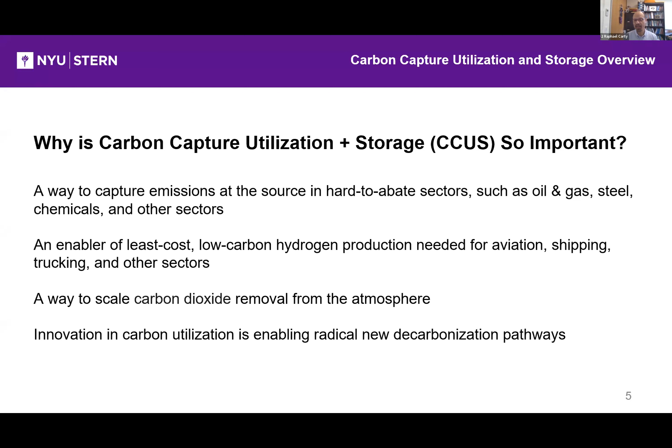This sector also provides a way to scale carbon removal from the atmosphere. As the window is closing to avoid the most onerous scenarios, we have opportunities with the technologies in this space as we cost reduce and get to scale on things like direct air capture to put carbon removal right alongside emissions reduction. And last, this opportunity to utilize carbon as a feedstock in all the different types of innovation and utilization is really unlocking radical new decarbonization pathways in a multitude of different industries.

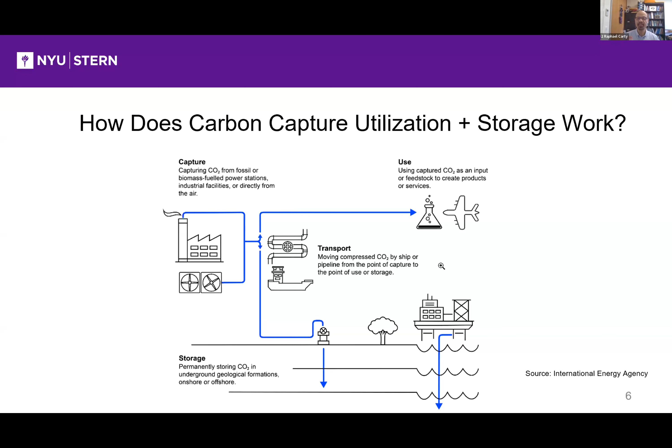Let's just talk for a minute about how carbon capture, utilization, and storage works. Up to the left, you can see that we're capturing carbon dioxide, whether it's from fossil or biomass-fueled power plants, industrial facilities, as I referenced a few moments ago, or directly from the air. Depending on the siting, that captured CO2 may be permanently sequestered right there in an underground area. But most often, the carbon dioxide is compressed into a liquid, transported, and then used elsewhere. And we'll get to the utilization in more detail in just a minute.

Let me just do a quick definition of terms. Carbon capture and storage was the original umbrella term for this space. Today, it's often used mostly for point source capture and storage, not so much from the atmosphere. Carbon capture, utilization, and storage is the new umbrella term, which reflects the increasing role of carbon utilization. It should encompass all tech in the space, but some people may still use it to refer more to point source capture versus direct air capture. Direct air capture is a much newer innovation, just about 24 years ago, capturing diffuse carbon dioxide from the air. It's an emerging technology that's critical for carbon removal.

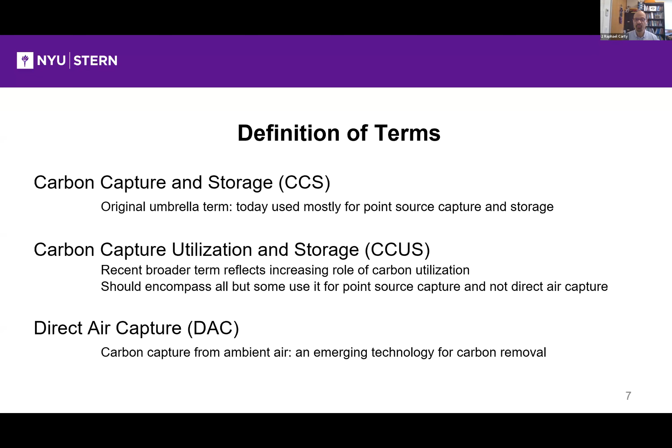Let's talk about innovation in the space. It might surprise you, but 90 years ago, the precursor to carbon capture and storage started when natural gas producers started to separate carbon dioxide from methane. Carbon dioxide in a solid form as dry ice has been used as a refrigerant for 90 years. It still is today. That's perhaps the first commercial carbon utilization market in America. As we fast forward to the 1960s, a new use emerged.

The first pilot plant for enhanced oil recovery came from injecting carbon dioxide into oil wells to increase extraction. By the 1970s, that reached commercial scale. By the 1990s, carbon capture and storage moved from just extracting more fossil fuels to being seen as a way to really help with emissions reduction.

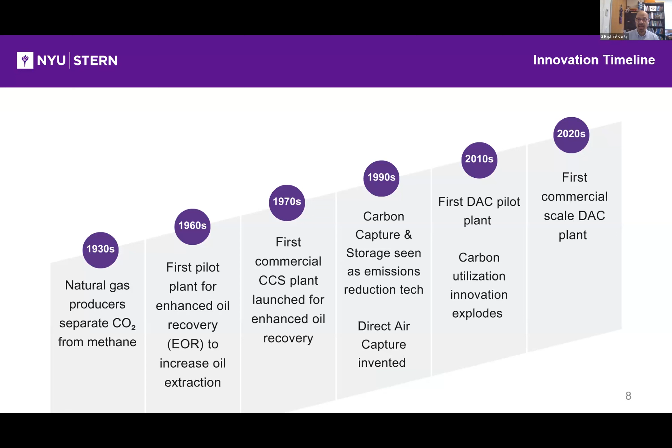And at the very end of that decade, in 1999, direct air capture was invented. Moving forward to the 2010s, we had our first DAC pilot plant, and this is when carbon utilization innovation explodes, as we'll come to in a second. And in the last year, we've now achieved our first commercial scale DAC plant.

Let's talk about point source to introduce Brian's talk. Original focus was on oil and gas fields. Today, it's a critical strategy and the DOE policy for reducing emissions in those hard to abate industries that I mentioned. But it's also being applied in non-traditional domains. And I think it's very interesting what CarbonQuest is doing in applying this to the built environment.

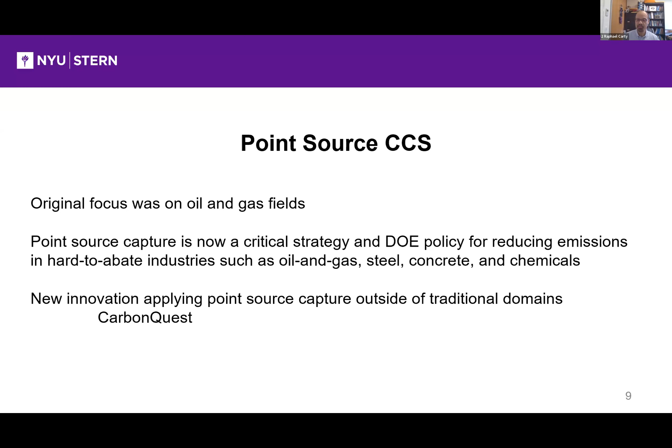Moving to carbon utilization, no matter where the source is from the center, on the right, we have the original utilization uses, starting with dry ice, then fertilizer, then additives to foods and beverages, or injecting it into oil wells. And in all of these uses on the right, carbon dioxide is not converted. It's just taken either in a solid form as dry ice or a liquid and as an additive.

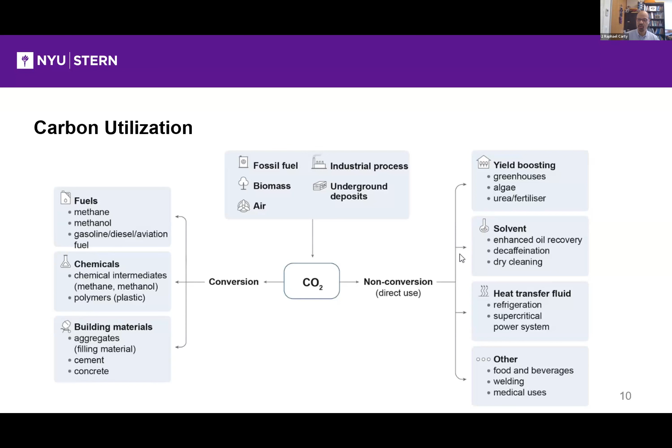As we move to the left, we get to some of the very exciting developments in the last 10 to 15 years. The conversion of carbon dioxide into fuels and chemicals, David will talk about that in a minute, or into building materials. It can be sequestered permanently by making it a component of cement and concrete. So carbon utilization today has gone far beyond fertilizers and putting the fizz in soda pop and enhanced oil recovery. Innovators such as Dioxycle are pioneering radical new decarbonization pathways by replacing petroleum derivatives with carbon-free alternatives using the carbon dioxide as the feedstock.

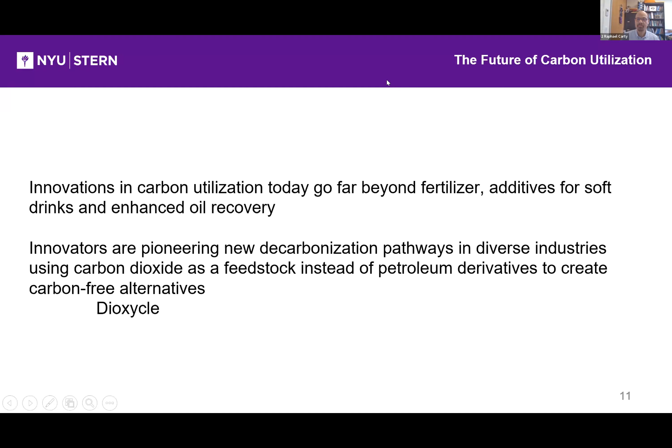So at this point, I'd like to turn the panel over to Brian, who will share his screen and talk about CarbonQuest. Thank you. Fantastic. And thanks, Professor Carty. Appreciate the invite to speak in front of you all today. Nice to meet you all.

I am Brian Asparro, the Chief Operating Officer for CarbonQuest. We're focused on reducing emissions in a large, broad built environment. The problem statement we're trying to solve here is reducing emissions in the built environment. Overall, emissions from buildings in the United States comprise about 40% of overall emissions. It's a particularly acute challenge within cities, where buildings comprise 60 to 80% of emissions. In New York City, it's 67%, with transportation and waste being the remainder of the emissions.

In particular, commercial and industrial, or C&I, buildings across the United States utilize natural gas, primarily for heating, hot water, power, steam, and that is one of the biggest challenges to reduce emissions. As a matter of fact, in New York City, the largest single category of emissions comes from natural gas to heat buildings. And it's one problem that's very challenging to decarbonize.

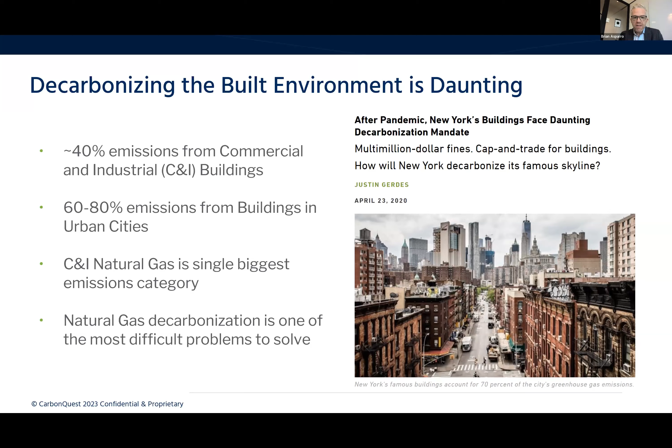So from a journey standpoint with CarbonQuest, we really see two main trends as it relates to compelling building owners to reduce emissions. One being sustainability initiatives, net zero, scope 1, 2, and 3 initiatives that have been set primarily by property owners or corporations as a competitive advantage. Second, regulatory drivers. These regulatory drivers are primarily in the form of programs associated with capping emissions for large buildings and emitters. In particular, we're seeing this becoming more acute in cities.

In the building sector, Professor Carty mentioned earlier hard to abate, traditionally being focused on large heavy industry, steel, cement. What we're seeing in terms of hard to abate is large buildings being hard to abate. What does that mean? Essentially, the cost to retrofit an existing building or property to reduce emissions is cost prohibitive. And so we should be looking at those types of industries or buildings differently.

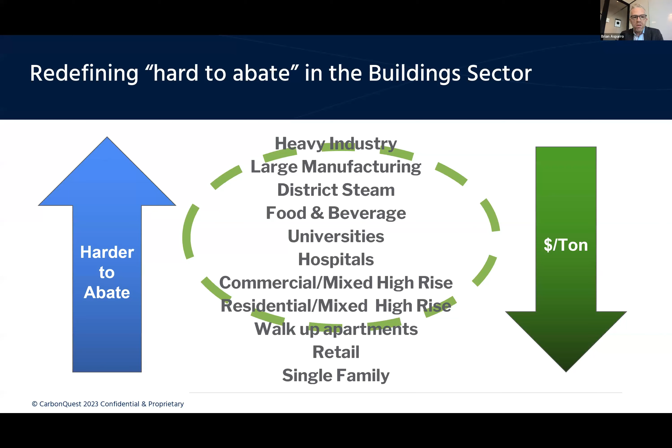What we're seeing is that it is now going from cement and steel into large manufacturing, district steam to provide heat to a university or a number of buildings, food and beverage, hospitals, commercial properties, large residential properties. And so the definition of hard to abate over time has become much more broad and challenging for large building owners to reduce emissions. At the same time, 20% of emissions in the United States comes from natural gas in large buildings. We've calculated over 700,000 large buildings that fit that hard to abate definition.

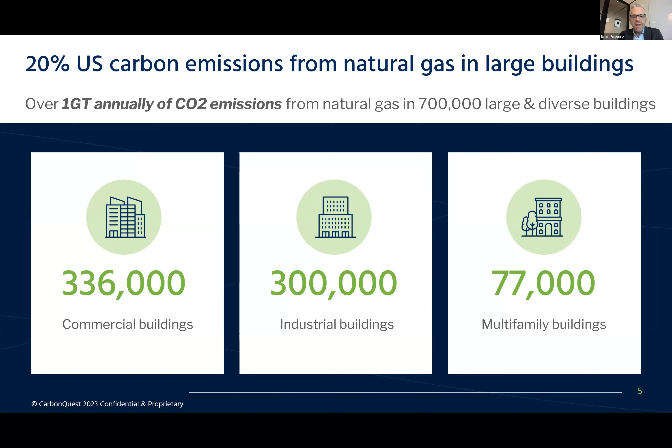New York City is one of the leaders in putting together programs to cap emissions. A program called Local Law 97 goes into effect in 2024, in a little over 2 months, where 50,000 of the largest buildings, all above 25,000 square feet, will have emissions capped and will be paying a penalty in the event that they emit above that cap.

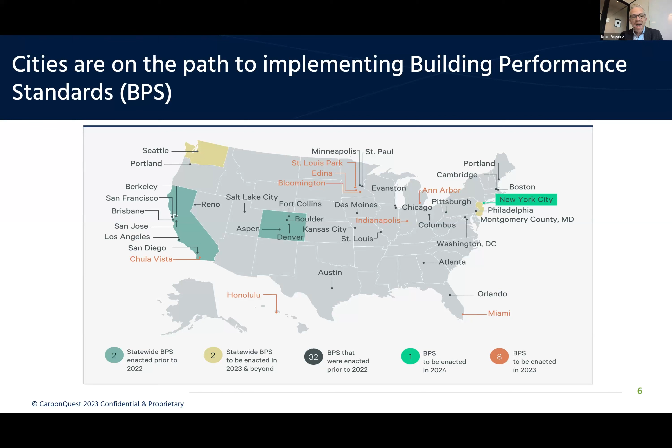Some of the pricing in the program with Local Law 97 is really the highest in the market at $268 per ton. It's estimated that by 2030, roughly 25,000 to 30,000 buildings will be subject to paying a penalty at almost an aggregate of $10 billion. And so this is becoming very meaningful for building owners to start to develop paths towards decarbonization, not just for sustainability, but also for looking at their own emissions and penalties that they may be facing.

And the challenge that building owners like NYU face with laws like this are penalties to be faced as a result of the emissions. At the time NYU installed the combined heat and power system, it was one of the lowest emission sources of power to be installed in terms of efficiency. However, over time, with a focus on reducing emissions significantly and immediately, there's a challenge associated with a significant amount of natural gas on site that will be creating emissions.

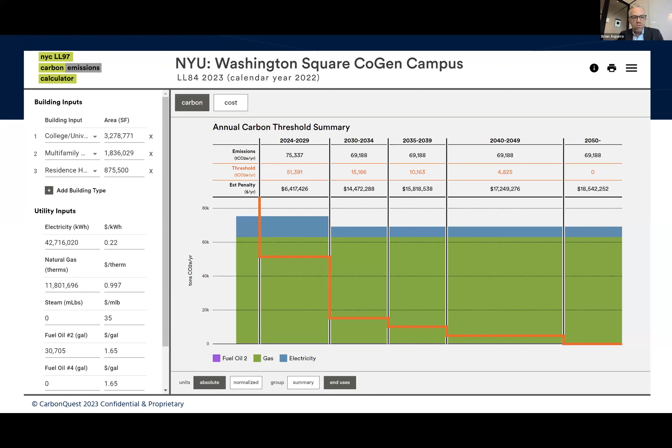And this is where we, as CarbonQuest, really saw a great opportunity. What are buildings to do in terms of options for decarbonization? There are options of buying offsets, on-site renewables like solar, energy efficiency, or fully electrifying the building or property in order to receive low carbon electricity.

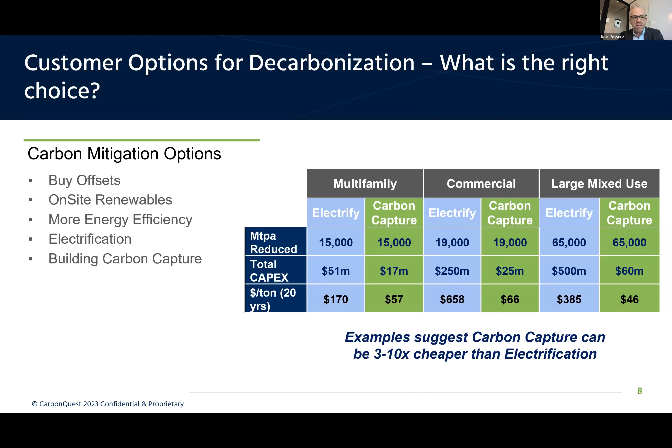What we're entering into the equation is what we're calling building carbon capture. As Professor Carty discussed before, traditionally this has been done at large industrial gas facilities and power generation, and we're taking it down to the building level. We're doing so because we're seeing that in cases where property owners are looking to electrify, carbon capture can be 3 to 10 times cheaper for the same amount of carbon reduced.

What is it? It's a technology that we've developed. It's a solution for natural gas emissions, which we call distributed carbon capture, a 4-step process where we extract flue gas, the exhaust that otherwise would have gone out the chimney, which includes carbon dioxide. We separate the carbon dioxide from the nitrogen and oxygen through a materials-based approach. We convert that carbon dioxide gas to a liquid. It's beverage grade liquid carbon dioxide, and then we utilize it in applications.

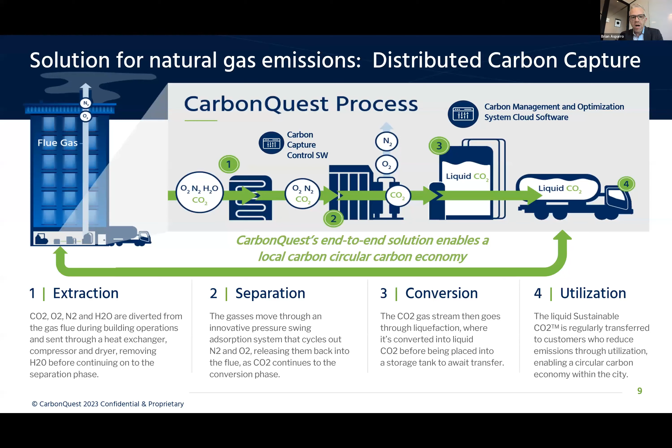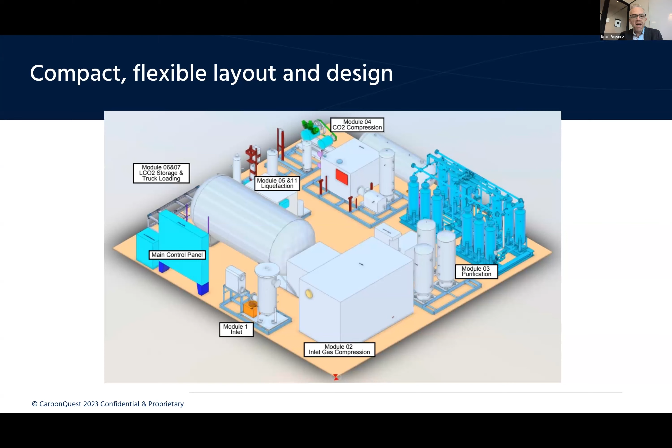In particular, we're focused on utilization of the CO2 where it has a benefit to the overall carbon economy, in areas like concrete manufacturing. This reduces emissions for the building owner immediately, while also providing a valuable input into CO2 utilization. It looks like a system on site akin to a boiler system that gets located alongside. It's a skid-based design and can be located indoors or outdoors.

The value proposition for building owners is that it's immediate decarbonization. It's cost effective; what we're generally seeing on projects today is a 4 to 7 year payback. It's not disruptive to an operation as it's an add-on, and we're able to measure and report on the emissions that have been reduced.

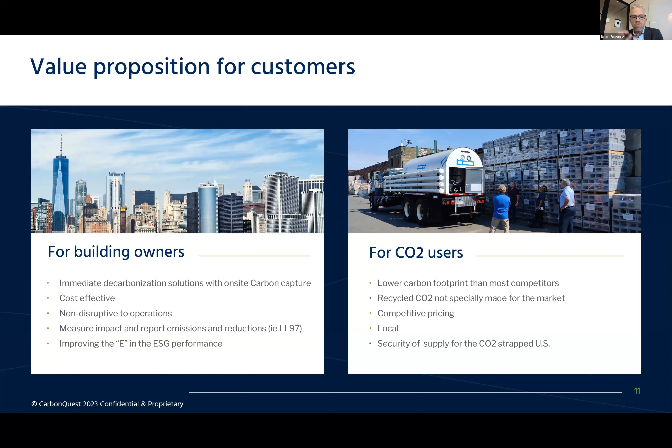The picture on the right is a concrete block manufacturer in Brooklyn, where we're actually shipping CO2 from one of our first projects in Manhattan. They use the CO2 coming from a building that was effectively used to heat someone's grandmother's apartment. And we're taking that CO2 and putting it into a concrete block that then goes back into your grandson's apartment building.

And it's a lower carbon footprint than most CO2 that's produced on the market. It's recycled, it's competitively priced, and it's local. We're shipping CO2 10 miles rather than hundreds of miles.

How we typically engage, we'll sell a project to a customer, and then we'll help them manage it over a 10 to 20 year basis in order to get the value, economically speaking, but also the carbon reductions that they can use for their sustainability or compliance reporting. We've now started to move into the market to offer what we call building carbon capture as a service, as a large part of the real estate market would either need or prefer a solution that can be an operating expense rather than a capital expense.

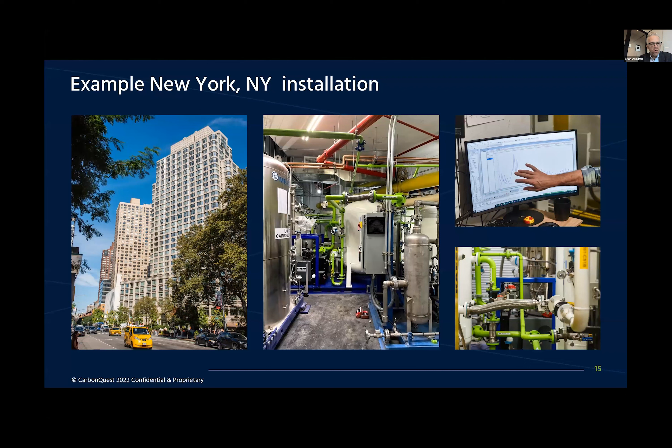Here's an example of one of our first projects at a multifamily property on the Upper West Side of Manhattan. It's been working for a year and a half, shipping CO2 to a concrete block manufacturer in Brooklyn. And we've just been able to show that this is really one tool in the toolkit for decarbonization of the built environment.

Lastly, I've been asked to talk a little bit about the innovation and S-curve journey. We formed the company a little over 4 years ago for what we felt was a great market opportunity. So we spent a lot of time in year one doing some early research and hired a bunch of smart people in the gas separation and systems development space. Years 2 and 3 were really built in our lab, building out the proof of concept, testing different types of technologies and approaches to something that we ultimately felt comfortable with and achieved what we felt was valuable to the market in order to start scaling.

And then year 4, we installed our first system, and this is really the early adopter phase. We've since sold and are starting to implement 5 more systems in New York City, and that's now starting to really take off, where we are going to start to focus on system integration, fast followers, and starting to build out further market and customer opportunities. So that's really all for the journey that we've been taking as CarbonQuest.

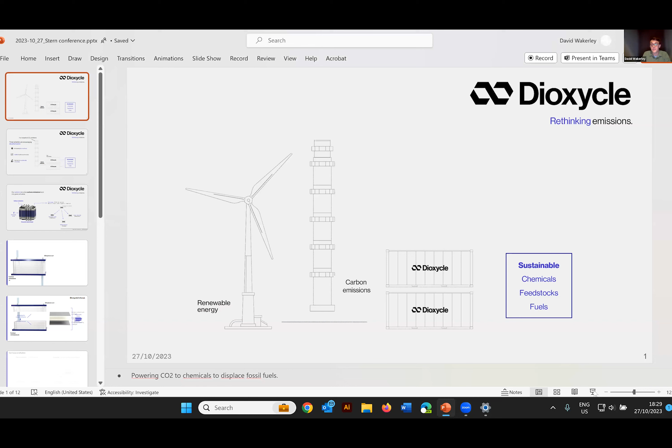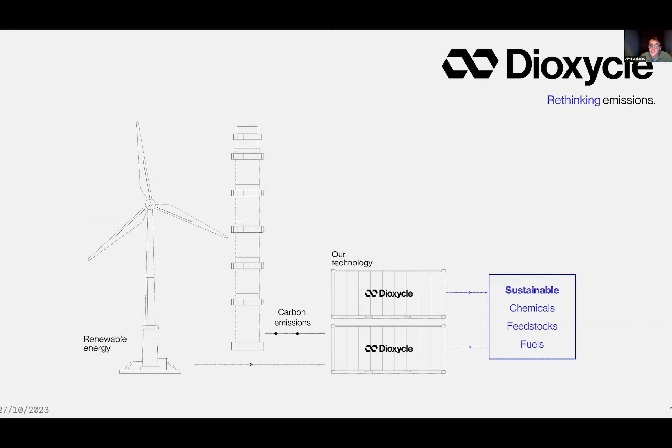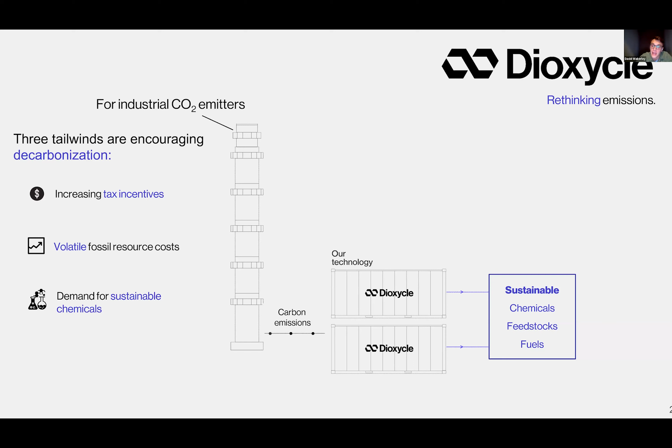So it's really great to be here today to present to you Dioxycle. We are a carbon utilization company. We take renewable energy, carbon emissions, and our technology in order to produce sustainable chemicals, feedstocks, and fuels. And we're doing this at a time where our future clients, the industrial CO2 emitters, are facing some pretty strong tailwinds for decarbonization. So they're being offered increasing tax incentives, they're facing volatile fossil resource costs, and importantly, people like us are telling them they have to start using sustainable chemicals in their process. And this is where Dioxycle comes in.

We make a carbon electrolyzer, which is able to take carbon emissions, renewable power, and re-energize those carbon molecules into sustainable feedstocks. In particular, we focus on ethylene. You may not really know much about ethylene, but it's definitely part of your life. It's the world's most used organic chemical. It has a market size of 170 billion per year. And it's really the Swiss Army knife of chemicals.

So it's on the screen right now. I don't want to do too much high school chemistry, but this is a molecule of ethylene. And here are all the different things, not even close to what you can do with it. But on a very broad level, you can react ethylene with oxygen to make ethylene oxide, which is a precursor for a lot of liquid chemicals. You can react ethylene with chlorine in order to make vinyl chloride, which is a precursor for a huge number of different materials, such as things like PVC.

And you can react ethylene with itself and make hydrocarbon fuels. And I won't go into how important those are, but you can imagine as well, this is something very valuable. And the really important thing for us as a company is we are providing these carbon emitters a technology that's able to give them a financial incentive to begin recycling their emissions.

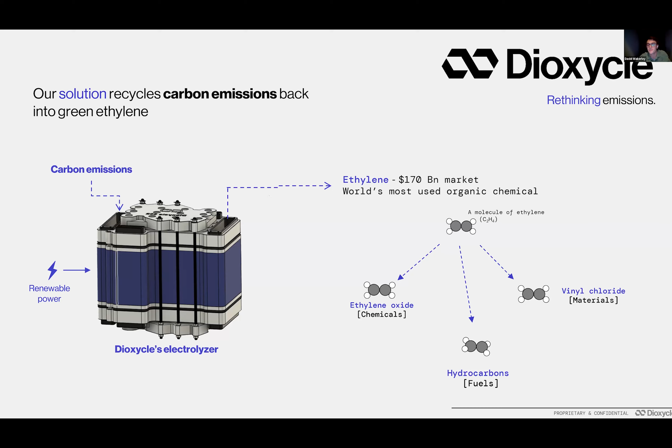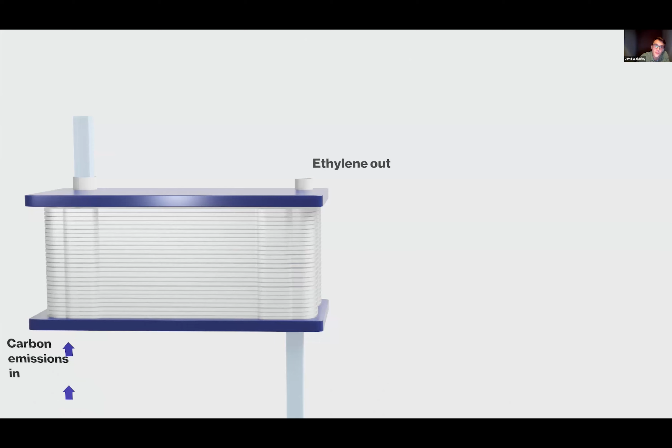I'm a technical founder, so I'm going to go deep into how the technology works. The way this electrolyzer looks is that it's a series of plates all stacked on top of each other. These plates have specific grooves which allow carbon emissions to be transported from an emission stream to our central catalytic core. That catalytic core is comprised of 3 layers. The first layer on the bottom there converts carbon emissions into ethylene.

There's then the central membrane that separates that first catalyst layer from a second catalyst layer, which converts water into oxygen. And I'm not going to go through exactly the chemistry here again, but the important thing is here we're taking carbon emissions and water, and we're using renewable energy to turn them into ethylene and oxygen. So it's really exactly the inverse of burning fossil fuels.

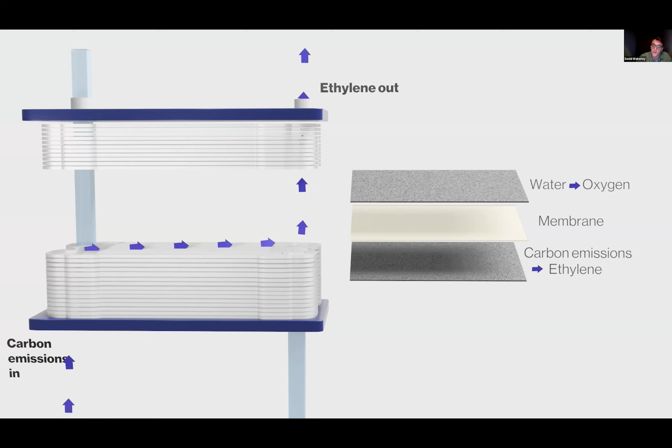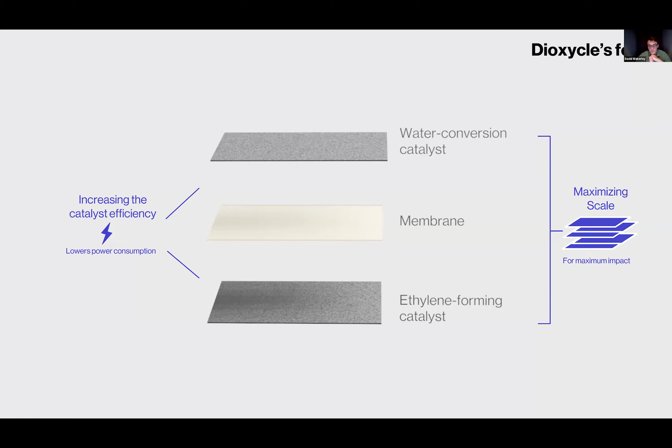And at Dioxycle in particular, we focus on optimizing this internal catalytic core. We focus on making the catalysts as efficient as possible, which lowers the power consumption of our process. And we work on maximizing our scale in order to have as large an impact as we possibly can. And just to show you the results of our development so far, we're just going to compare ourselves now to our competition.

The incumbent technology for ethylene production is called steam cracking. It is a process where you take oil or gas and you just heat it like crazy until the molecules break down and you make molecules of ethylene, and it's very carbon intense. So steam cracking produces around 1 to 1.7 tons of CO2 for every ton of ethylene that's produced. And every year that process generates around 260 million tons of CO2.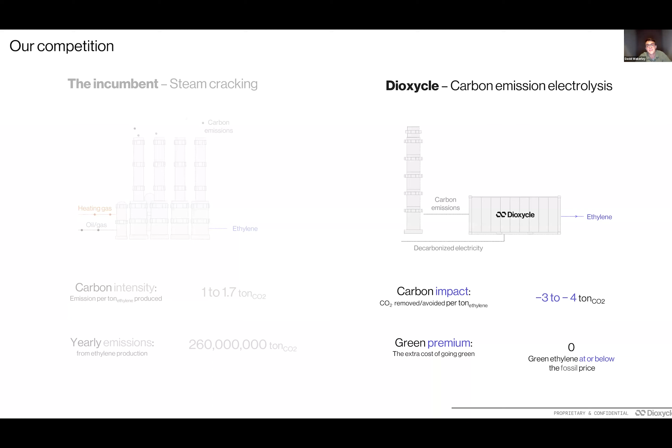On the other hand, if we look at our technology, our electrolyzer, we are taking those carbon emissions and actually converting them directly into ethylene. And at the same time, we're not doing any steam cracking. So overall, the potential carbon impact is around 3 to 4 tons of CO2 prevented for every ton of ethylene we produce. And at the same time, because our process is particularly efficient, we're actually able to produce that ethylene at about the same cost as the fossil alternative. And in some cases, we're actually able to undercut the fossil price.

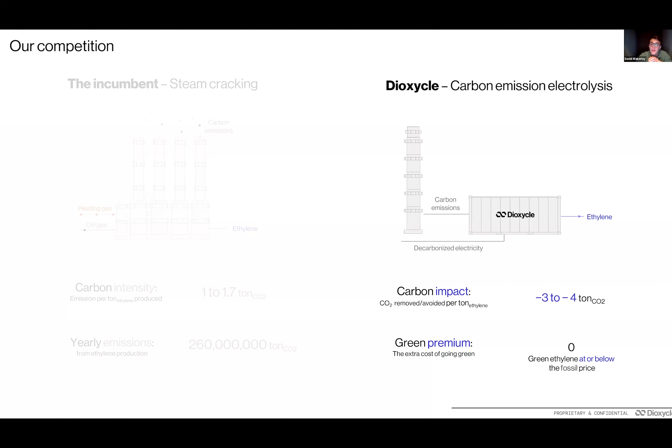So the green premium, the extra cost of going green, which is often seen as a big barrier to adopting these new carbon utilization technologies, doesn't really affect us here. It's basically zero, and sometimes we even are able to offer a green discount. And we really believe that's key to getting our technology off the ground quickly and adopted at scale.

And overall, this is our big picture perspective. We're looking to be able to decarbonize over 700 million tons of CO2 every year, preventing them from being emitted both by not doing the steam cracking and at the same time by recycling those emissions. And so far, so good, I would say.

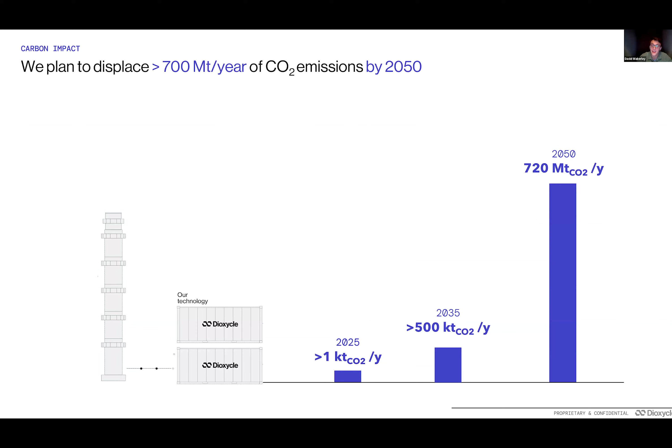And again, I was also asked to give you an idea of how we got this innovation off the ground. We're a little further down the S curve. You imagine that this graph is just on that very beginning part. We're 2.5 years into the company. And this is just my depiction of our journey so far. So my co-founder, Sarah, and I, we were both technical founders. We were both working in Stanford and Cambridge and the Collège de France in Paris before we founded the company.

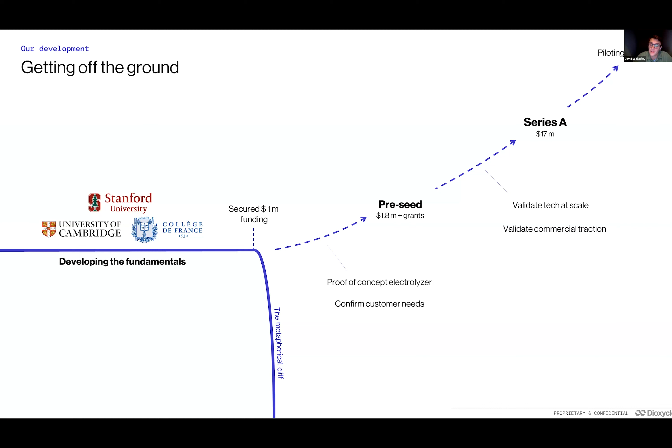We worked on the technology for a combined 10 years before jumping off this metaphorical cliff here to start the company. The beginning of the company was really just proving that the technology was real, it could work at scale, whilst also talking to customers, making sure we were making something that was really interesting to these industrial emitters. With all that confirmed, looking positive, we raised our pre-seed, which allowed us to basically repeat the same process, but at larger scale. So we validated the tech again at an even bigger scale. We validated commercial traction and then raised our Series A. And now we're in the process of making our industrial pilot reactor. So that's where we are right now.

And second, we really focus our development. We make sure we set very clear goals. We make sure that we hit those targets. Basically, it's very simple. And finally, the last thing we've always tried to do as a company is to iterate quickly, because the faster you're iterating, the faster you're finding problems. There are always going to be problems, but the quicker you find them, the quicker you solve them. And that's it from me.